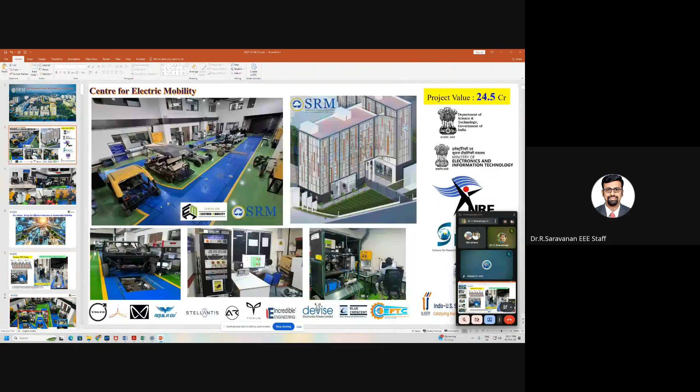Bharatiraja sir, welcome sir. Hello sir. Is my screen visible? Yes sir, visible sir. So first of all, I would say a small apology since I had not noticed this. No problem sir. So till what time do we have? Till 6:30 to 8, sir.

Okay, fine. So let me start from my first slide, about where I belong and about our Center for Electric Mobility, followed by today's topic, recent trends in electric vehicles. So basically I am in Kattankulathur campus, this is one view of our campus, and our center's name is Center for Electric Mobility.

Sir, can you switch on the video? I will take a screenshot. Definitely, you're able to see me, right? So yeah, this is basically our lab facility. We have a full-fledged building for this center. We are almost equipped now with many instruments which are mainly for development as well as testing.

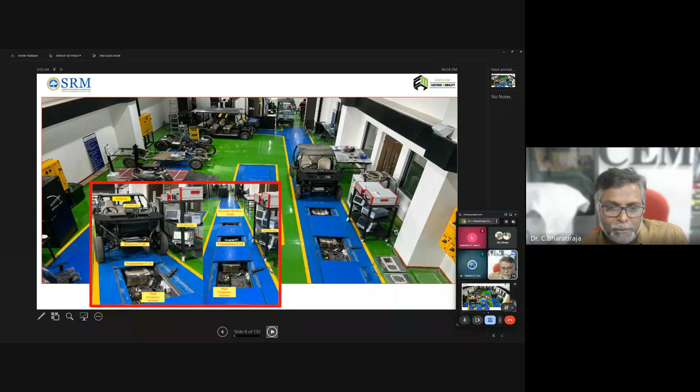So such kind of capacity we have. Currently we are working with dynamic wireless charging with a capacity of 11 kilowatts, but this setup is capable of going up to 50 kilowatt capacity. This is one of the best features we have in our center. There are some ongoing projects with the wireless charger, such as charging for scooters and some battery related fuel cell work.

Of course, this is an EVSE charger. Any charger to be validated with the dynamic value of the grid, this instrument will help mimic the actual grid. Sometimes we can force sag, swell, and other power quality issues. This could help validate vehicle-to-grid and grid-to-vehicle aspects.

And this is our HIL facility. Hardware-in-loop is very important, either to develop a motor controller or for microgrid or any hydrogen study. So we have a dedicated HIL for motor controller, and we also have a dedicated HIL with a dyno setup for testing the motors as well.

So you can see these are the major portfolios we are working on. Of course, we are covering all areas of EV, starting with motor development, controller development, charging development especially wireless charger. We are doing a lot of tier level products, energy storage meaning battery as well as fuel cell, and we are also working with charging infrastructure in a consecutive manner of microgrid and nanogrid structure.

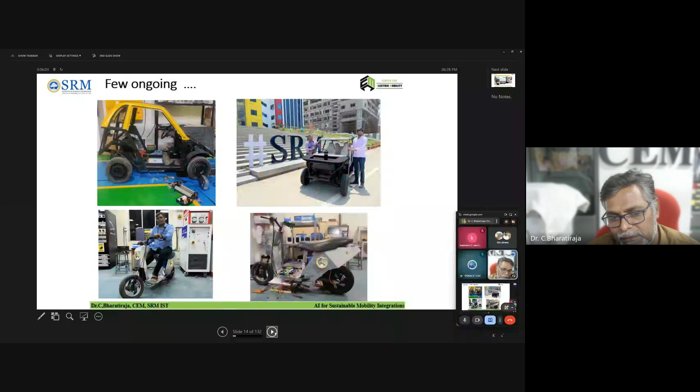Apart from that, currently we are working on benchmarking some EVs at full vehicle level, including wireless charger and scooter level. So these are some of the pictures. We donated this exclusive autonomous vehicle to DST, as you can see this was given in 2023, and now it is in operation at DST.

And there are many companies we have collaborated with. I just added one picture with Stellantis. Stellantis has donated 2 vehicles for research purposes, one for validating with the wireless charger, another for polyphase motor. Currently this work we are doing with Stellantis.

So today's outline is that I wanted to give some overview about EV. You might have had a lot of information from social media, and I believe majority of students and faculty here could have collected so much information from different forums about EV within India and outside India. Definitely you could have collected some metrics also. So probably I am recapping, or telling some new information, about different architectures of EV, which is very, very important.

Then individual system level, how it is structured and what performance is expected. And end of the day, whatever we are developing in the laboratory has to go to the market, so some compliances we have to follow, and what is the current market access in this portfolio, we will see. With respect to the world, the order is something like by 2030, majority of the automobile segment will be converted into EV. The reason is very simple: people want to migrate because of fossil fuel dynamic pricing and renewable energy penetration. But very importantly, we want to make green energy so that this carbon footprint will be reduced.

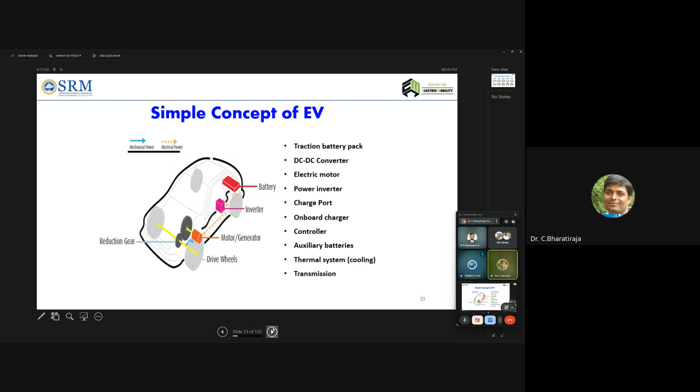This is probably a light vehicle chassis unit, so these things are additionally added. So different architecture will be there in the EV. In an IC vehicle, everybody knows we have a diesel or petrol tank passed through the engine for operation. Beyond that, we have a different category that uses EV with IC engine.

So probably we can say hybrid electrical vehicle. Many companies are actually developing hybrid electrical vehicles. Even Maruti, which has very high market capital in India for selling cars, is not producing or selling a single pure EV, but they're developing a hybrid EV with Toyota. You all know the hybrid Maruti Hyryder and all, it's a very good vehicle. So basically in a hybrid vehicle, we have a battery inside and of course a motor inside.

Whereas in a plugged-in hybrid vehicle, the battery is a little higher. So what is the difference between hybrid and plugged-in hybrid vehicle? In a plugged-in hybrid vehicle, you can connect the battery to charge from an external electrical supply, so the battery size also will be higher. Automatically the plugged-in electric vehicle gives better range than the hybrid electric vehicle. It's all about the cost factor.

So BEV is nothing but battery electric vehicle. It's a pure EV which has only a battery pack, it does not have any kind of petrol or diesel engine inside. So this is what everybody is looking for.

So the hurdle with us here is that this battery pack is not sufficient enough to serve like an IC engine. Petrol or diesel you can easily refill, but the battery cannot be charged very quickly. Provided you want to extend your range, you want to increase your battery rating as well as sizing, if you increase the sizing, the vehicle cost will go high. So this is a win-win situation problem: neither can we increase the size, or the fast charging of your battery has to be supported. So either way, only through this can the pure electrical vehicle succeed.

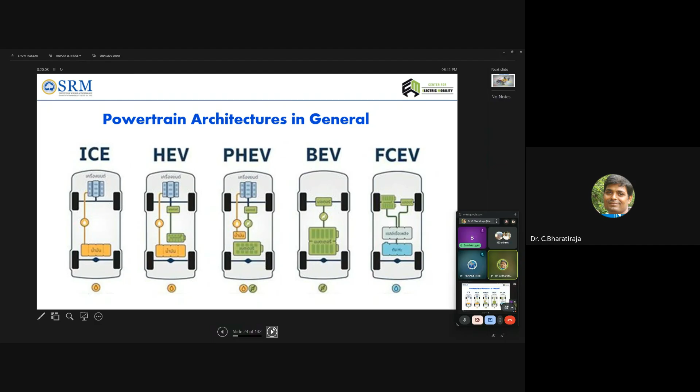As I already mentioned, this will give a clear picture of how the car segment EV architecture looks. Basically, you have a traction motor, which is used to drive the vehicle.

For that traction motor, you want to control it - that is nothing but your motor driver, which will be very close to your motor. And you have a battery. In any segment - car, bus, any vehicle - the battery will be associated or allocated on the floor of the vehicle body. So it is a floor mounted battery.

Then of course you have a charger to charge this battery, and to connect the charger you have an onboard charger, because you always have an AC supply or DC supply. Suppose it's AC supply, you have to use the onboard charger to convert AC into DC.

And then you may have an auxiliary battery. It's a small battery used for the electronic system, as well as door opening, closing, wiper motors and all that. So the traction battery is only to support the motor to drive. This is the general architecture of an EV.

If you see other aspects, how the plug-in EV will be - again, as I already mentioned, there will be an engine and petrol or diesel tank, provided you have a charging point to connect the battery.

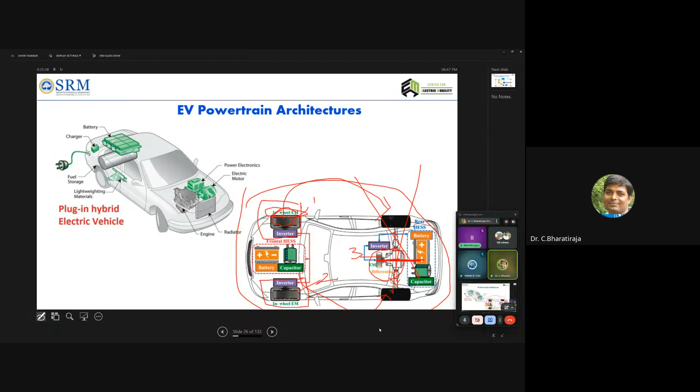Suppose this whole portion I am removing, again this wheel is also connected with another motor. When all wheels have a motor connected, it is a four-wheel drive. So basically this is the equation.

So the electrical architecture, if you take any EV, it is something like: any wheel you have a differential. Why do you need a differential? Different speed allocations and all will be there. And next, you have a transmission. This transmission captures whatever force is coming from the motor.

Then this is the motor. Here I mentioned BLDC motor, but you can assume it is any motor. The motor controller will operate the motor, and the motor controller needs a DC supply, which comes from the battery. The battery needs to charge, so you should have a charger, which comes from a DC-DC converter. And sometimes a super capacitor is also there in the vehicle.

Whenever you give a brake to your vehicle, the existing back EMF or available magnetic field will go to charge the super capacitor, because the battery cannot capture that amount of quick charging. So it goes back to the super capacitor, and the super capacitor then discharges into the battery. So the battery only, end of the day, drives the motor. All together it has to be operated - this is called energy management. This is all there basically in any EV.

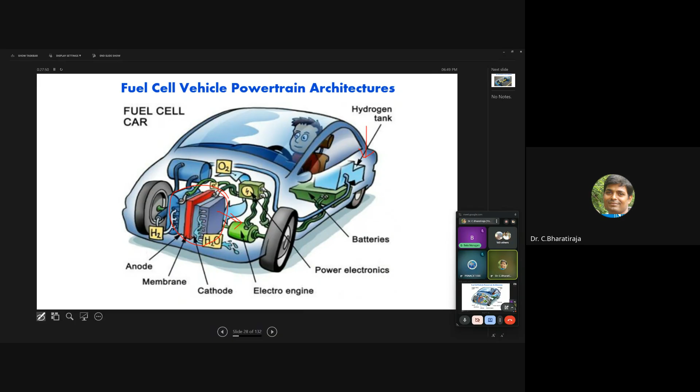So this is a picture of a fuel cell. This shows how they attach the fuel cell - you can see this cylinder is quite dangerous. Fuel cell systems normally involve three parts that an academician has to consider: first, hydrogen generation, hydrogen storage, and hydrogen usage. As electrical engineers, we can use the hydrogen usage part, but very importantly, hydrogen storage and hydrogen generation are also important. Hydrogen generation within the vehicle is not possible as of now.

There is no technology yet, but the entire world is working on it. Hydrogen storage, however, is possible - we are all using cylinders for storage. You cannot imagine, this is 100 bar pressure, 200 bar pressure. At that pressure it gets explosive, affecting nearly half a kilometer. So this cylinder holds a huge amount of hydrogen.

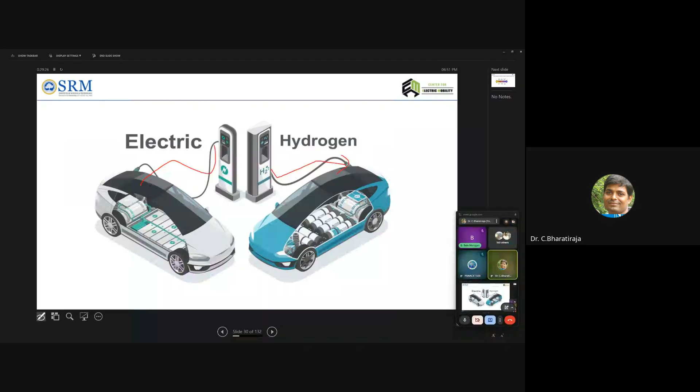Roughly about 20,000 liters of hydrogen in gas or liquid form. The type of cylinder, and how you manage the thermal aspects and all, is very important. Wherever the car body has space, you can attach your cylinder - there is some procedure for this. So the point is, neither electric nor hydrogen vehicles avoid refilling. Hydrogen is filled as gas or fuel, while electric means you have to fill, what do you call it, your battery.

So we'll just skip some slides. This is what the real powertrain will be - you can see whatever these small components are. This is the battery module, and the whole system is called the battery pack. On top of it, there is a unit called BTU, battery terminal unit, which gives DC supply to the motor control. This cable, whatever I am marking now, represents the cable for the entire vehicle.

At present, the entire industry is working at, in the past, 400 volts. Now from October 2025 onwards, all EV companies have decided to go for an 800 volt system. Why 800 volt system? With that, you can have a huge amount of energy density in the battery and a lighter amount of cells, so that your car body portion will be reduced to half of it.

The question is about energy density batteries, which were previously not available but now are. That's the reason the industry moved on to 800 volts. When you go to 800 volts, your cables are not highly intensive with respect to current, so your wire harnessing, as well as interoperability, EMI, EMC, all go down. That's why the industry moved to this higher voltage, called the 800 volt system.

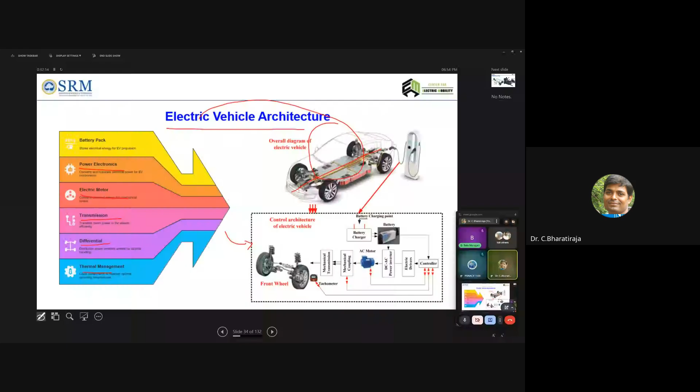So generally, nobody goes straight away to manufacturing the vehicle. First they go for a model; each and every component they design, they build the model controller, they validate it in HIL and SIL. HIL means hardware in loop environment, and simulation environment as well. Then component by component they interface in the vehicle body, and then the whole vehicle is manufactured. Then they test it multiple times. Only then does it come to the market.

Now I am going to tell you what future powertrains will look like in the market. This has already started. A company called ZF is doing this. As of now, this mid-drive motor will look something like this. You see there is a wheel, a shaft, and the mid-drive motor will be here. So for this whole portion, 3 to 4 OEMs will be there. OEM means original equipment manufacturers, working together to develop a system.

So assume that this is a system. There are multiple OEMs working together. For example, if they start today, they would end up finishing this project by 2030. But that's not how it can be done hereafter. It has to go very fast. For that, the powertrain itself is being developed segment by segment.

So there's a mechanical powertrain model and an electrical powertrain model. The electrical powertrain model is what I'm showing here. The mechanical powertrain model is probably about the spring and braking system. As you can see, one motor will be here, another motor will be there. These systems are connected to the vehicle body. You can straight away connect this item into your vehicle and make your powertrain in a shorter time.

You can see motors engaged here. This is the current system, what we have available, but the market is moving towards this kind of system. This is how the mid-drive is connected in the truck. The mid-drive is in the middle portion, and on both sides you can connect your wheel and operate it individually. You have a brake drum and other mechanical connectors.

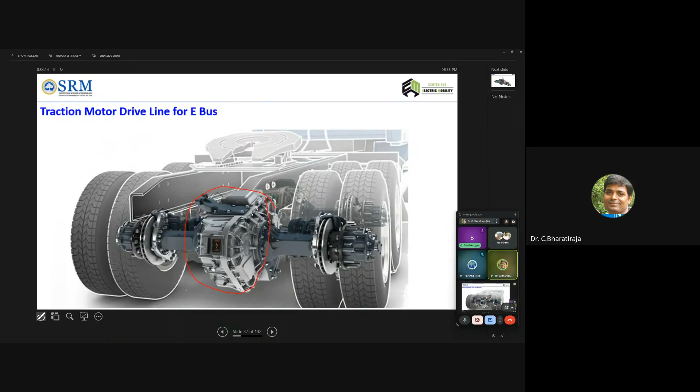This is the same system I explained earlier; I'm just focusing on the blender drawing for your further understanding. There is typically weight balancing as well, but don't assume this is weight balancing — actually it's a hydraulic system for suspension. It uses a special suspension that includes a double layer: one is hydraulic, the other is an electrical linear actuator. With that, it operates in a millimeter range of suspension. So all of this is available.

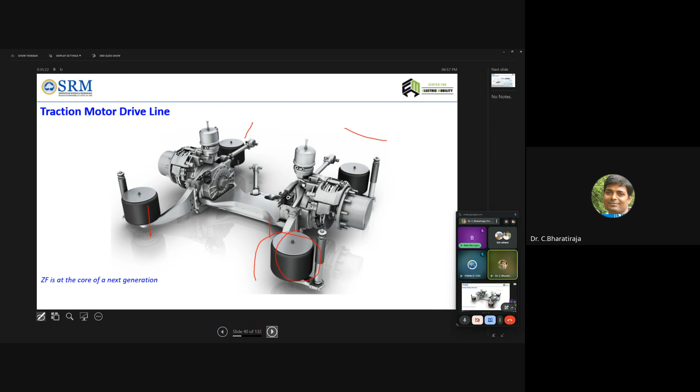So then, how does this fit into the bus? You see, it's a very huge bus, but the portion where the wheel and motor are connected is very, very, very small.

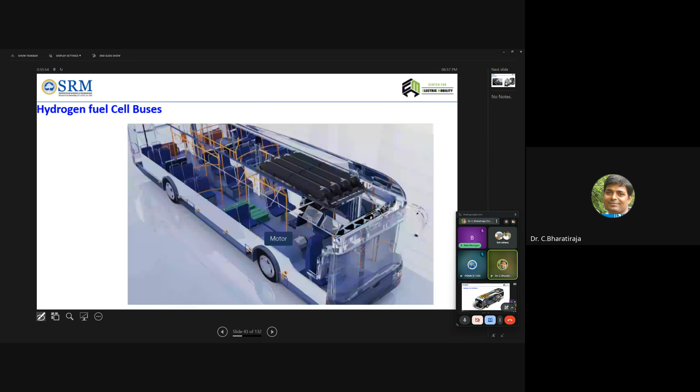So yeah, first for understanding, I'm just having some figures to know about how the motors are connected.

So coming to battery, as I already told, the battery is connected in the platform. So battery means battery cell, then battery module, then battery pack. Number of cells is module, number of module is actually pack. You can see this is module.

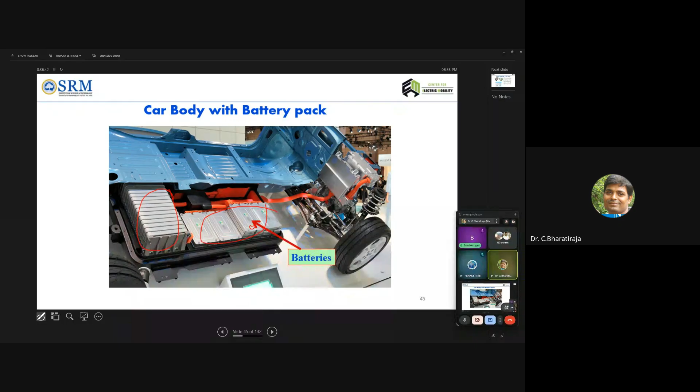Number of module and number of module combinedly it's called number of pack. So basically this is one module, this is another module within that pack. You open the module, furtherly what is there, it is cell. I will show you later, okay? Probably I can show you later.

The question always there, what is peak power and what is rated power? Assume my car is moving in this road. So my cursor is a car moving in this road. Here there is a portion speed breaker. Here there is a portion is a hill. So now my car is moving. So this is a flat road.

I could derive the power from the motor is the same. It's a rated power. Suddenly I am going a speed breaker. I need extra power, correct. From what? From motor. What is the formula? Basic formula for motor, P is equal to 2 pi nt divided by 60.

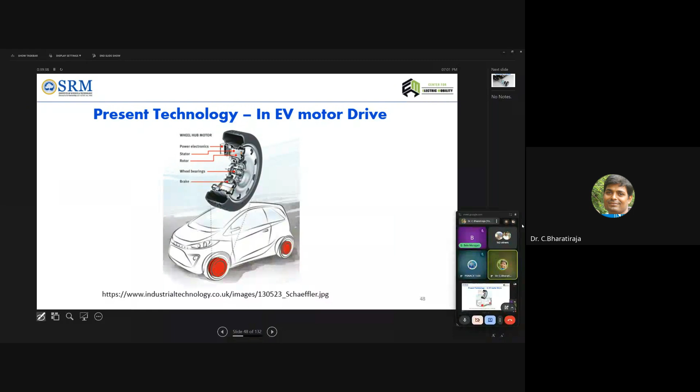So what is in-wheel motor? In-wheel motor means your motor, power electronics converter, controller, brake, what else? Everything is there within the motor itself. So that is called in-wheel motor. As you can see in this picture, all are there in the wheel itself, wheel drum itself.

This picture gives even more information. You see, this is wheel, this is your casing. I just connect the motor here and attach my brake shoes and disc brakes. So in such a way, you can build your motor within the vehicle wheel itself. Now you see the powertrain, how very simple way.

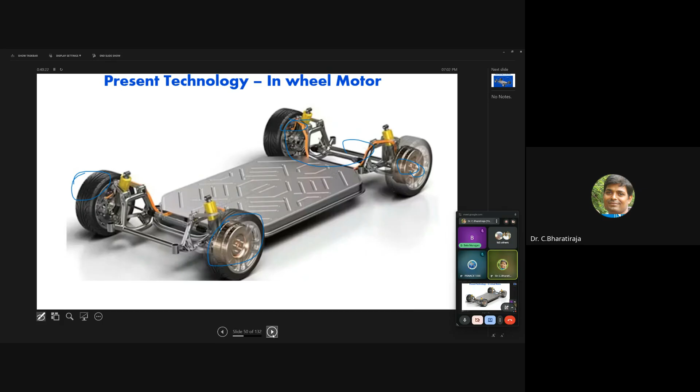So this is what the present technology on the what do you call a powertrain, it's called in-wheel drive. So basically, car body will be so simple then. So you develop your powertrain and superstructure and other aspects. These are already available in the market, right? The very clear picture is also available.

Okay, so basically this is in-wheel motor. You can see within the wheel itself, power electronics, stator, rotor, bearing, everything will be there.

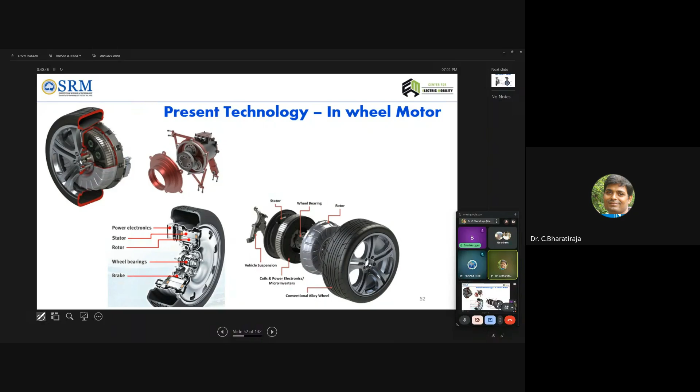So see the suspension for the in-wheel motor. So basically, now the market is moving on this kind of suspensions. So initial suspension means normally we have suspension straight away to connect to the car body. Now this kind of suspension are recommended.

It is there in aeroplane basically. So what will this help now? You see the wheel of the vehicle always operating at about 70 to 80 degrees, even lesser, never 180 degrees. But this wheel is capable of going to 180 degrees. If it goes 180 degrees, then the vehicle can park in the vertical position. So this is a parking area. Normally the vehicle has to go here, go here, go here, and then go back. But in this case, the vehicle can come here and go straight inside.

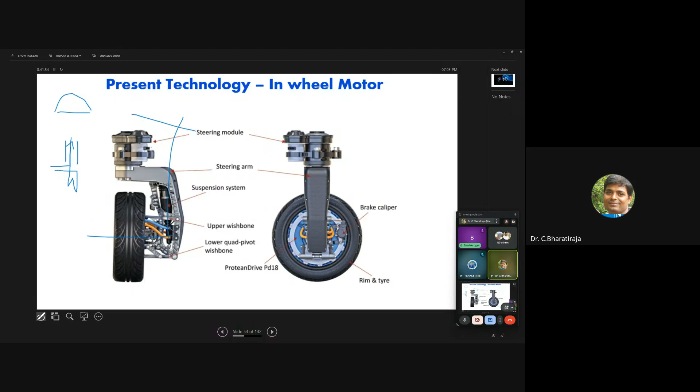Okay, so about the in-wheel motor. The permanent magnet synchronous motor, PMSM motor, will be classified into two types. One is radial flux motor, I can call it radial motor. Another one is axial flux motor, I can call it axial. This axial motor is what is called the in-wheel motor. The size is very, very small, so you can connect it in the wheel itself.

So this is the difference between radial and axial, how it is working. In a radial machine, basically you have a stator with pole pitch throughout, and the winding is also totally continuous, distributed winding. Whereas axial flux is a concentrated winding, scattered like within the pole itself. That's the reason axial flux motors are small in size. But there are a lot of challenges for axial flux, particularly thermal handling and other kinds of issues.

I'm talking about many things about the motor, right? So currently we are developing, through one project, a 40 kilowatt motor. What we have to do is reduce the magnet. Magnet is very, very important in the motor, but with respect to cost, the magnet is the biggest culprit. Why culprit? Because the cost of the magnets is very high, and the magnets are also not locally available. If you take India, we are not manufacturing any magnets, it's all coming from China. China is so good at manufacturing magnets.

China doesn't have much mining actually, mining is there in some other countries, but China imports minerals and creates manufacturing facilities to manufacture the magnets. Neodymium magnets are used basically for the permanent magnet synchronous motor, especially for EVs, neodymium 45, which is a high-end grade. So we took an opportunity to design a motor such that we could reduce the rotor magnets, meaning only the rotor has magnets. We fixed a 23% reduction target and we achieved it. And stator copper loss we also wanted to reduce, so we designed it such that we are reducing 10% of the copper winding itself.

Then we developed a 400 to 600 volt traction inverter, with which we are driving this motor. Finally we have to bring a system like this, inclusive of controller, motor, and as well as gearbox. So now we are working on it with this system.

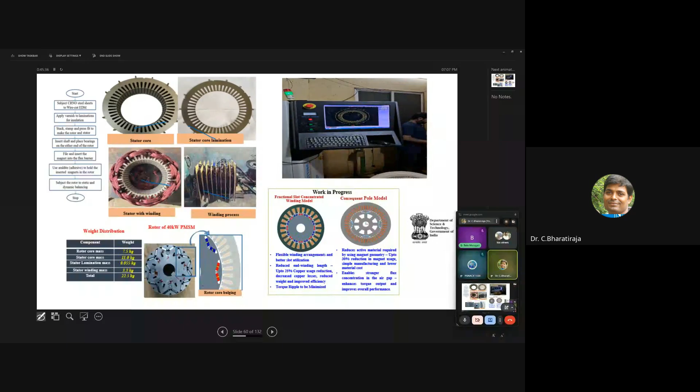How do you do that? It's all real value, what we are developing, and we are also comparing with that. Some of the results I have mentioned here, how transient performance and steady state performance of these motors are validated. This has been tested in the system, these motors are tested in our lab actually. So you can see the student testing continuous performance as well as discrete performance. We are continuously validating with a different range, operated through the power supply, which of course mimics your battery.

Okay, then coming to battery, as I already promised I am going to showcase the battery pack and module and all. You can see this is the battery pack. Once you remove the battery pack, inside you have a battery module as well as cell, and the BMS also there. Now look at that, the cell will have 3 or 4 types, I can say. One is cylindrical cell, another one is prismatic cell, another one is pouch cell. So the cylindrical cell is this one, prismatic is this one, and pouch cell is this one. Pouch cell is what you have in mobile phones. Now the entire market is focusing on pouch cells. There is one reason for that, does anybody know the reason?

Those attending here, anybody know the reason? Even one student sitting with me, listening to all this. You know the reason? No reason. I will tell you the reason.

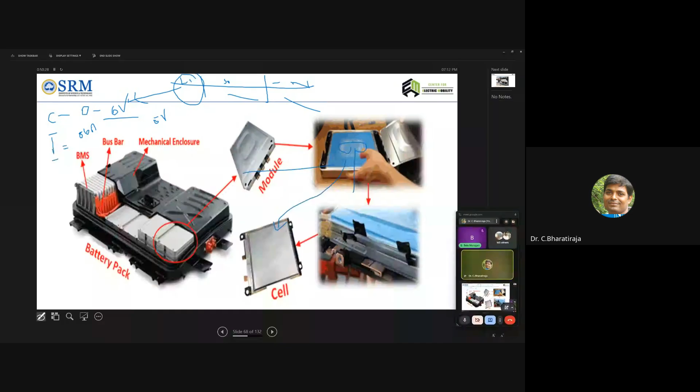So as I already told you, 0 to 6 volts. So current rating, AH I may say - recently we are testing one company, so I will take that value. It is 86 amps pouch. So one pouch, 5 volts - let's say take 5 volts, not exactly 5 volts, like 4.6, something like that. But I will take 5 volts, 86 amps. Then it is an 800 volt system.

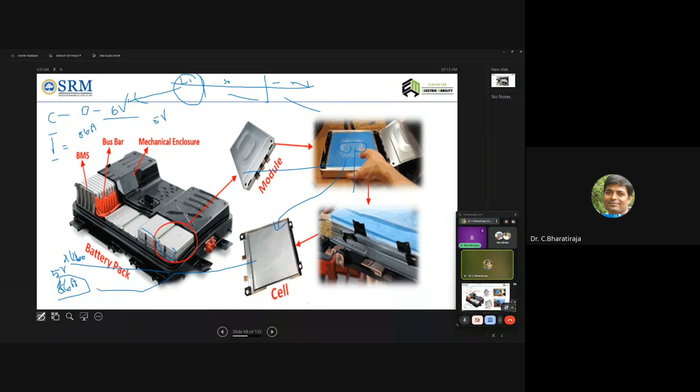Of course you will have 40... 160 series you want, nearly 800 volt system. Then 86 amps current. So likewise, you can create a module. Then all together, electrically you can connect. You will make a pack. So end of the day, the pack will be like this.

So this is for a bus. For understanding, I am showcasing. For a bus, normally pouch cells they will not go because pouch cell is so costly. It may be prismatic. So this will be one pack. This will be another pack. This will be another pack. This will be another pack.

When you put the electric gun to charge, all will charge simultaneously from the EV power. But it all has separate connectivity while charging, individually discharging. We are thinking that all are charging combined - it's not like that, it will all charge separately.

So if you open the bus backside, you can see the battery on the other side. Mechanically, you can remove this side, but electrically, you can charge this side. So you can even keep a battery on the top also if you want to provide extra range.

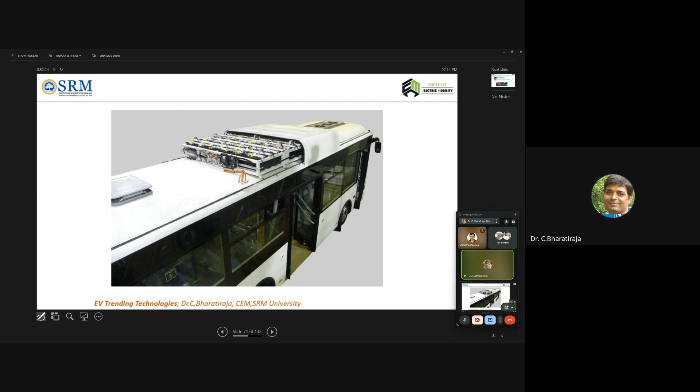So I'll skip something and go to the battery management system. Take any battery management system, its duty is to manage the cells, battery pack and module, provide thermal and other reliability, and measurement of the SOC, SOH and all that.

Now in recent days, almost one month, people are talking about battery Aadhaar. Anybody knows about it? Participants, anybody knows what is battery Aadhaar? I don't think anybody has an idea. So globally, there is a term called battery passport. So battery Aadhaar within India, battery passport in the entire world. It's very simple, like a passport - it is easy to understand where you went, when you entered a particular place, when you came back to the country. Am I right or not?

So likewise, with an Aadhaar number itself, they will understand everything about you because KYC will be there. So when the customer is buying the battery and goes for a service, he is sometimes fighting with Ola - why did the charging happen, why did all this happen? Because there is no proper data within that.

So India recently announced there is a battery Aadhaar - who is the seller, no matter which car company it is, the seller, manufacturing date, packing date, selling date, vehicle first time charge, second time charge data - likewise how many times you are charging, where you are charging, what service you have done, what components you have taken. Five years later, you are selling your car to somebody, or selling the battery alone to somebody.

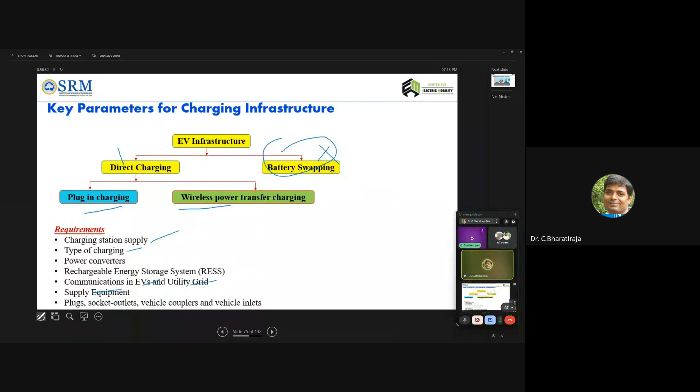But for direct charging, there will be plug-in charging and wireless charging. If you take wireless charging or plug-in charging, there are some requirements you need for developing a charging infrastructure - one is the charging infrastructure, type of charging, communication with respect to EV and grid, sockets and vehicle coupler, inlets - everything is needed, so all together it may be designed.

So, onboard charger, in the sense that you are available with the AC supply, you have some battery BMS inside the vehicle. So you have a power electronics converter where PFC, rectifier, and some charging unit charge your vehicle. So at present in the market, chargers will be available in AC as well as DC.

So if you have AC single phase, yes you can charge. If you have AC 3-phase, you can charge. It's very simple - assume there are 6 pins. Plus and minus, these are engaged for DC charging. So this is neutral, R-Y-B. Suppose it's a single phase charger, these two will be engaged, or if it's 3-phase, R-Y-B will be engaged. So whatever AC is available, then onboard charger - DC will be available, this is the off-board charger.

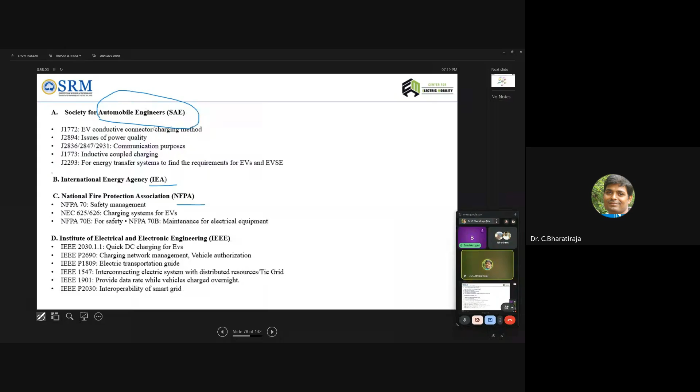There are some standards for charging. There are also standards for motor, but not as many. For charger, there are a lot of standards. SAE, Society for Automobile Engineers, has a standard for charger, communication, coupling, and all about. Internationally we have standards called IEC and IEA, and some fire protection standards. That is NFPA, and IEEE also have some standards.

So the key strategy for any charger is the mechanical design. That's very, very important. Then EMI, EMC is also to be addressed. Then performance, which means voltage, current regulation, efficiency, and fault recovery. And environment also, the IP protection.

IP protection means, for example, if you take a wireless charger, water, ice, all will appear on the road since the charger will be on the road. So you have to protect properly with shielding. IP65 is a standard for testing with the rain scenario.

IP67 and 68 is for flooding scenarios. So all these need to be tested: humidity testing, cycling testing, thermal level and salt testing, even needle testing, pressure testing. There are so many tests that need to be done. Then electrical safety, installation testing, ground testing, and overground protection testing.

Nowadays people are very concerned about cyber security testing as well. Why? Because, as I already told you, KYC of battery and all. Anybody can easily enter into the BMS. They can give malfunction data to the BMS to operate the vehicle battery through BMS. So the whole company can collapse.

It's very simple, even I can do it. Why can cyber security crime people do this? Simply you can enter into the BMS, go to the threshold value, change the threshold value, that's enough - automatically everything will be gone. Am I right or not? So the battery life goes down, or even sometimes you can blast the vehicle if it is a wireless charger.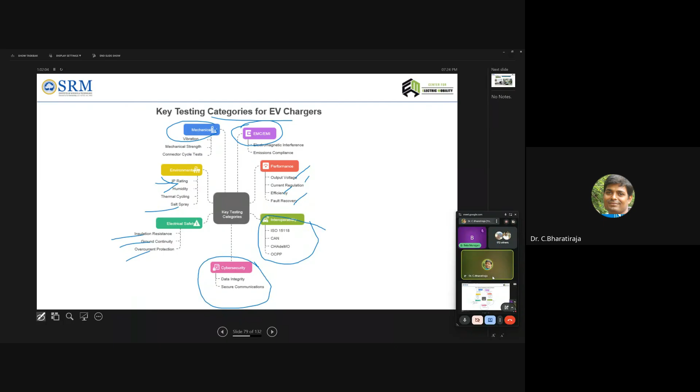So this interoperability needs to be addressed. Now another charger I want to explore - it is called pantographic charger.

I am 100% sure this will be a solution for India's local bus service segment. Why am I telling you this? Because this is already experienced in Japan. For this pantographic charging, you don't need the highest level of infrastructure - you just have a pole on the road.

I assume you've seen this green bus parked on a Japan road. There is a lane where the bus stops, then a pantographic lift comes and attaches to the bus. During the time passengers get in and out of the bus, a high amount of voltage, 11 kilovolts of system, is supplied. After that, the bus has a transformer on top that steps it down and goes to the battery to charge. So in 1 to 2 minutes the battery gets charged.

But likewise, the bus stops at so many places, so throughout the day the bus can operate - shorter distance, shorter charging time. It is called pantographic charging. This is basically the architecture. I don't have much time to explore this, but I will show you some pictures of how it is supposed to be.

So this is the way to operate. The bus driver will give some signal, and automatically the pantographic motor will come and attach. This is highly possible. At the bus stand, nothing to do - you just park your bus, create some pole over there. During the time of bus parking, it will get charged. Look at the cost - nothing. There will be a big transformer already available, just giving the wiring is enough. Some infrastructure needs to be addressed.

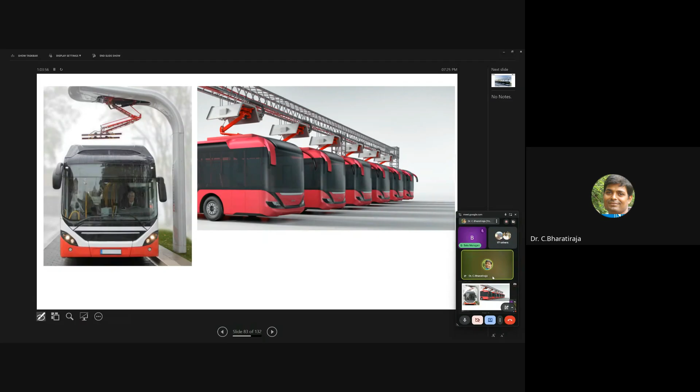It's already there in Japan. This is called pantographic charging. Okay, so this is wireless charger - even better than pantographic, I may say, but cost-wise and some kind of handling issue will be there. It's nothing bad - when you charge your vehicle, it gets charged. That's the concept actually.

So for wireless charging, according to my perception, South Korea is better than any country. They developed open lane EV bus wireless charging. It is available anywhere in South Korea. The bus will go and park on the blue color line, and it gets charged automatically. So this is the structure of what they have actually.

There is an orange color and a red color pad. The red color pad is a receiver pad connected to the bus. The orange color pad is put on the road. Likewise, so many pads also can be attached - since the bus body is bigger, you can attach many things. The road is also already there.

They are already built in the UK. Renault has tested this. But in the future, not all roads will be connected with wireless chargers - only a certain portion will have the charger. So as you can see, there is a car here about to cross a certain portion. Here, a huge amount of current will be passed through the car - this is the flash charging concept. Then later the car will go a certain 5 km free, then again get charged. So during motion itself, you can charge, but a lot of research is happening in this area. Let's see how it goes.

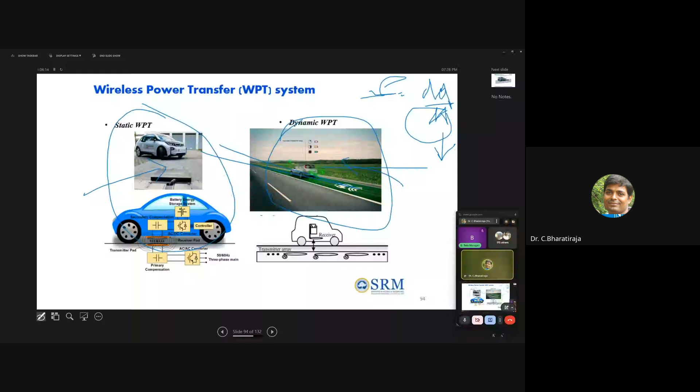So with wireless charger, again, static when the vehicle is parking and while vehicle moving, you can charge. But this is not highly proven because the formula is E equals dφ by dt, the rate of change with respect to time. Time here is vehicle speed - as vehicle speed increases automatically, the denominator increases, so the numerator, the net value, will go down. So as vehicle speed increases on the road, the charging will get reduced. So you have to go slowly - that is the only hurdle in front of us.

But now people are talking about - it's very funny - while one vehicle is going, another vehicle behind it gets charged. That's called vehicle to vehicle. At present, vehicle to vehicle charging happens in a wired way, but people are talking about one vehicle going behind following another vehicle to get charged. But who knows, this is also possible very soon, practically.

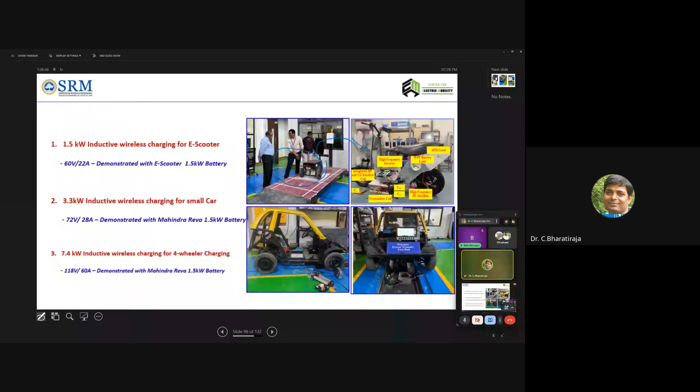So we developed so many things in wireless charger. As you can see, for the scooter we have done a demonstration - this we have migrated to a real scooter. For the car, initially we did a demonstration, and now we have built the whole system in the car, and some pictures for your information.

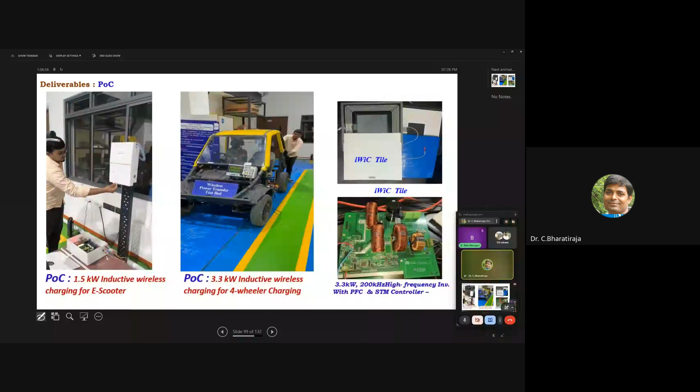What my student is doing - we developed a POC where the scooter just parks, he has a card, you swipe the card, and automatically the vehicle gets charged. So these are the tiles we developed for that - it's a wireless charging tile. In your home, you can replace your tile with this to charge your vehicle. So what do you need? One tile, and also one power electronics converter you have to buy.

For a scooter, we are experimenting - this goes as a startup. We are experimenting for 25,000. Any scooter owner is supposed to spend this money, and they can convert their vehicle into a wireless charging vehicle. It is 1.5 kilowatt, so that vehicle will be charged in 5 hours time.

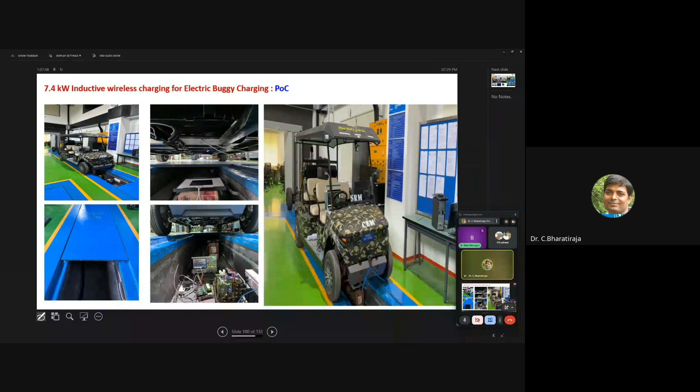So now presently we are working on this for a car also. Initially we are testing with the buggy because it's very comfortable to test. So now this testing is going on with the wireless charger, not only for static but we are working with the dynamic also. These are the experimental setups we have developed for that. We basically have extensive instruments to calibrate all the flux carrier paths and all about. So the first experimental setup has been done, and then we are moving into vehicle-level integration.

And we will go for the calibration of coil, foreign body, magnetic field, as well as the temperature and all about. So these are the final products what we have developed.

So this is under MeitY project. Wireless tile is ready. Grid connected inverter is ready. Power electronics converters for the input power factor correction is also ready. So this is a whole small circuit for the charger.

Presently we are working with 4 coils simultaneously like this, so that the scooter can charge with one coil, whereas the car, parking with the 4 coils, the car also can get charged. That kind of system we are building now.

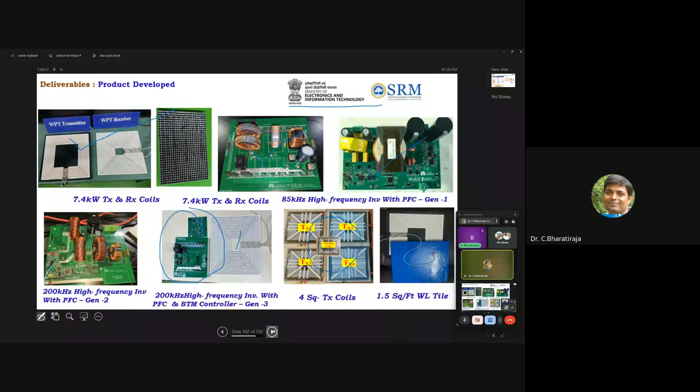We are also developing the application to take a pilot study in your SRM, attaching maybe 10 scooters for wireless charging. They can book a particular lot, and some EMS as well as a payment gateway we can produce. So this is what it is.

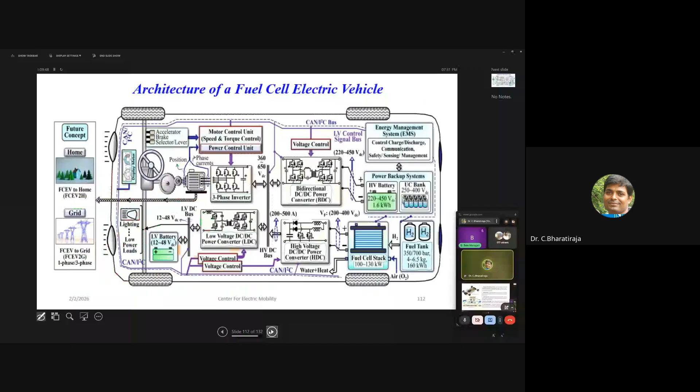So fuel cell, we are working on many things. Let me explain what we are doing. So this is our fuel cell. Basically, fuel cell means we have one PEM membrane. We have hydrogen, and the rest are all the portions what we wanted to put into the vehicle.

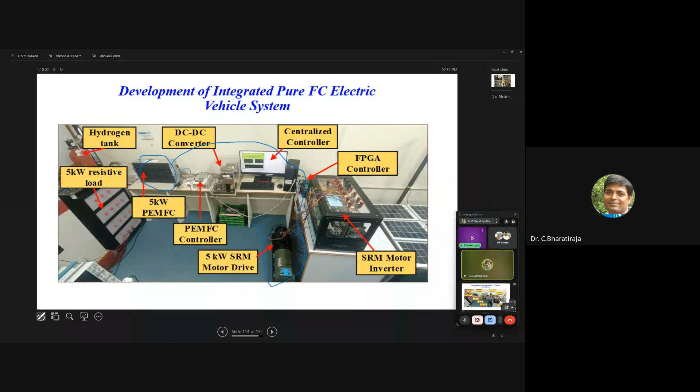So basically what we are planning: we want to develop one vehicle, a 30-seater vehicle, for 30 kilowatt fuel cell. So it is converting an IC vehicle into a fuel cell vehicle. We just wanted to demonstrate this, so for that we already developed one small

vehicle. Actually, it is called a lab experiment vehicle. Totally, we are engaging with fuel cell type, 2 cylinder, 5 kilowatt capacity. We are able to run this car actually.

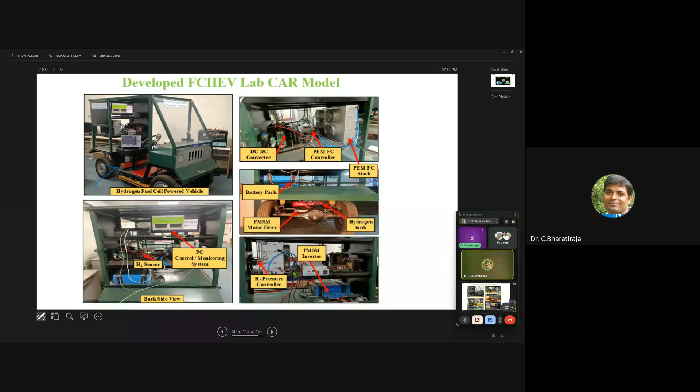Okay, so I think we are also working with autonomous vehicle. I'll give you a small introduction. So the autonomous vehicle, in the sense that there is no driver, of course. The point is, this is a big picture. So when you think about an autonomous vehicle, the rest of the things are all very conventional. Whatever you can, even you can park your Benz car near to this, a car coming to discuss with an autonomous vehicle is nothing.

Which one? This Benz car is nothing. They may have ADAS 4 also, no problem, it's nothing. Correct. So it is all an imaginary account because it's not being developed. People are talking about AI, many things, right? It's not being developed, but nobody can stop it. It will become very soon.

A vehicle without a driver in this huge Bangalore, Chennai, Delhi, Mumbai traffic, it will go. Uber as a company maybe can operate within India for the city. What do you call Uber's, what do you call cab service, nobody can stop this.

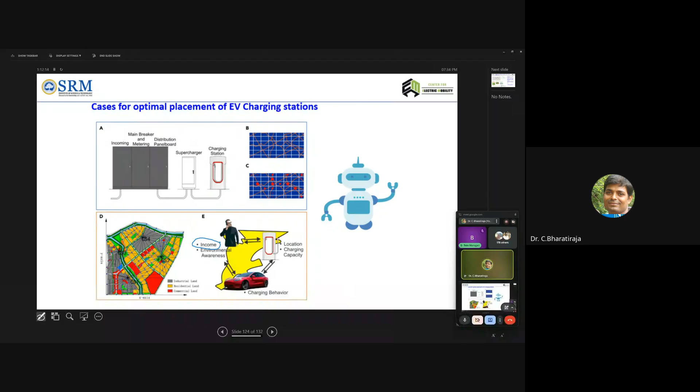Since autonomous is growing and AI also growing, correct? So what is needed? You have to include the AI, and this is very important because autonomous vehicle cost will be very high. Whether this vehicle makes income or not, that's the only thing we have to work out. But anyway, we are academic research, we don't want to bother about whether it makes money or not. Let us start to bring some technology. But for industry, of course, it has to be.

So yeah, there are multiple autonomous vehicles. We have to develop some digital twin to handle the battery operations of each and every component, because initially the driver gets an alert signal. Even if oil is less, we will get an alert, we will replace the oil at present. But once there is no driver, who will handle what's happening inside the car, car cleaning? Components will influence and all about. So there should be a digital twin.

So what is a digital twin? Anybody know what is digital twin? No idea? Okay, so digital twin is nothing but.

Today I am late 10 minutes, right, for this FDP program. This is my mistake that I didn't notice, I thought it's day after tomorrow, but anyway this is my mistake. Suppose if I have a digital twin, I dictate my digital twin to take this entire seminar like me.

You got it? I have a separate twin for me. The twin will do the respective operation. Let me do another operation. This is called digital twin. So a perfect model can be made. That model can mimic further.

So that's what digital twin is. Of course, the digital twin will be engaged with battery modeling and other aspects. Sensor is also getting a lot of role. Sensor and digital twin all together only make autonomous vehicle.

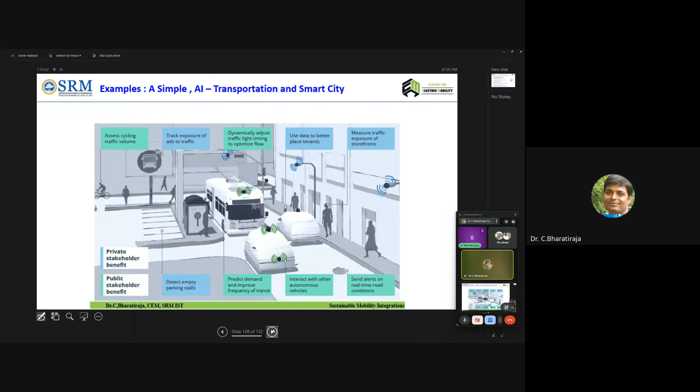So somebody wants to take a picture, those who are doing research in AI, in autonomous vehicle or electrical vehicle side with the inclusion of AI, I have prepared this slide. What are the AI tools you may use, what are the ways you can use AI.

You can take a screenshot if you want. You can plan for your research by using AI. So what we have done in our campus particular area, we have mapped it. Can you show one more time, sir? Previously. Yeah, you can take a screenshot.

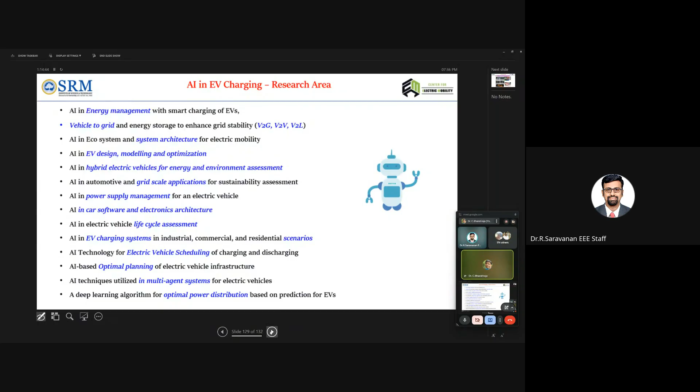Okay, so what we have done, we have developed an autonomous vehicle driving with minimum autonomy. Why minimum autonomy? Our campus has more than 1 lakh students. Of course I have intention to go further, but I don't get a proper trial track.

So we are getting a vector path, mapping everything. We developed an autonomous vehicle for campus commute. I will play it. I don't know why I'm not able to play it. Oh my god, so basically this is a video, I am not able to play.

So our students are testing at different levels. Since there are a lot of NDAs within this, I cannot show more than that. But of course, we are very good in autonomous, and we are developing something for defense purposes, so that's the reason we are not able to show.

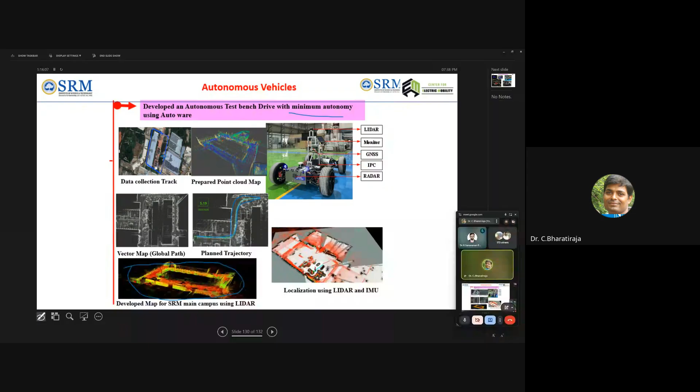So what we have done is create a 3D map, a vector map. Within the vector map, we set up the target area, as you can see here. Within the target area, the vehicle will go beyond. Within the map, whatever the floating value also, it will go and operate. That is the way it normally works.

We even tested it the other way also. Let me check whether that slide is available quickly. So these are the autonomous vehicles we have developed. You see, we are totally disengaged, removing steering and all. I think the system got hung. Yeah, so you can see this is the vector map.

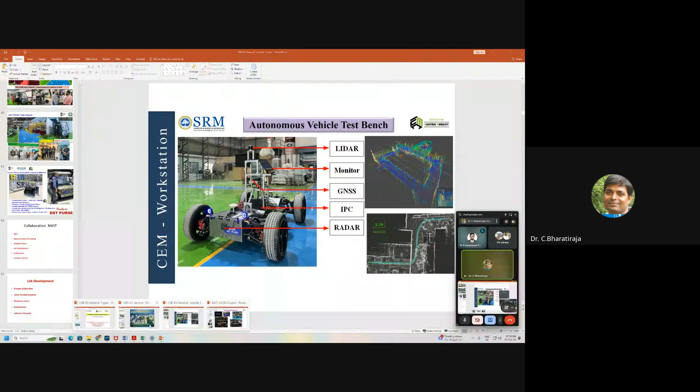Sorry, I don't have that video. Maybe you all know my LinkedIn? Bharatiraja Chokkalingam is my LinkedIn. On LinkedIn I have demonstrated all the videos, you can see. So my LinkedIn page is Bharatiraja Chokkalingam, so from that you can take it, you can see, probably you can understand.

Yeah, so with this I'm concluding. Our success story is very simple. We want to build our own vehicle, inclusive of our own systems. But of course, I don't have the capacity to build a battery pack right from the battery powder. But now we are working with one company for developing a battery module with their cell. So BMS and all, but not the battery cell. Leave the battery cell, rest everything we are inclusive, and we are now developing a vehicle which is capable of going fully autonomous.

And I'll proudly say this could be a benchmarking value, not just one, but a benchmarking value for autonomous vehicles for the country. So with this I thank my major financial contributor and supporting structure from DST, as well as my team. Because of their funding and my team, we have reached this level. I hope we will continue the same. So now I am open for the audience to discuss something.

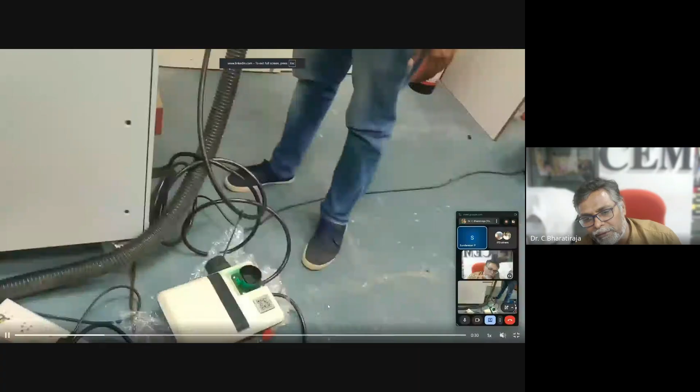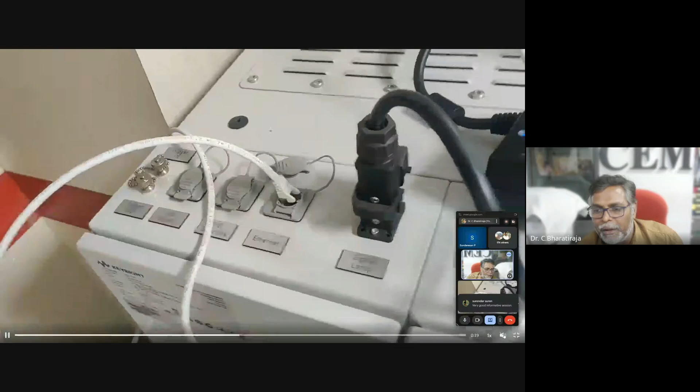Whenever any opportunity is available, it is posted on LinkedIn. Go to my LinkedIn, go to the post, go to the video, you can get it. Sure, sir. Nice presentation, sir. Thank you.

Any participants, ask questions, sir. Am I audible, sir? Good evening, yes I'm audible. Sir, is there any workshop available in this February month? Actually, I am also a research scholar doing research in Chennai only. So is there any plans?

February, I think I'm opening all the personal data here itself. Okay no problem, just a minute. My students are planned, just let me tell you. On seeing all your facilities, I'm really very excited. If it is possible, we can come and have a look and get some ideas. Sir, actually I'm just a fresher now, just 6 months are over, so I think a lot of new things are upcoming. Is it possible so that we can see?

So, you see, February 23rd you want to start? Fine, sir. Okay, 23rd, but it's not 6 days, I'm planning to wind it up in 2 days only. Fine, sir, in 2 days we will cover something reasonable. So we can apply through your LinkedIn itself, sir.

I will check it. What I told actually, you all are supposed to be on LinkedIn. So I will post on LinkedIn, so you can easily get a notification. Thank you so much, sir. Thank you. I will do it, thank you. Or else I will do one thing, I will connect and get all your mail IDs from Madam.

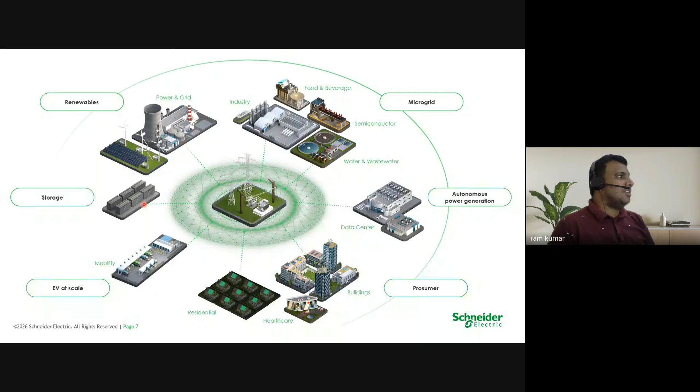The next thing is storage—battery energy storage. It has been an expensive topic in the past, but there are technologies and researchers coming up to maximize the utilization of battery at the scale of grid. Still we have a long way to go in research around battery energy storage, because the cost of ownership or maintaining the battery infrastructure is getting very expensive, so nobody is interested to invest.

But if we get some technology or research that comes up with a more efficient battery at grid scale, this is also going to scale up. Because without storage, renewables don't have inertia—it's a known thing. With the combination of efficient storage and renewable, we might be able to replace fossil-based power generation. So the opportunities are coming in this direction in the current market.

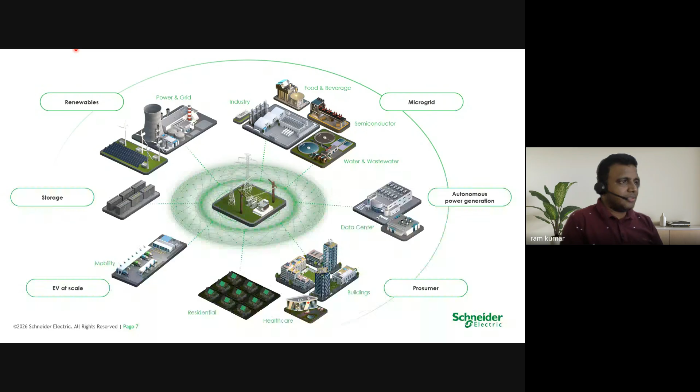Now, what is important? Energy and industrial intelligence. When I say this, I'm speaking about how to control them. Today we are speaking about an efficient world where we want to consume better energy, energy which can be more efficient—meaning the losses are minimum.

Most of you understand the power system as a whole. If you have proper planning—if you are able to plan what this residential human needs for the next 30 days—we can plan this infrastructure better. So this intelligence is going to rule the future.

You might even say, is everything connected today? Yes, slowly everything is getting connected. I'll show you in subsequent slides how everything is getting connected today. When everything is able to be connected with electricity, with the same electricity, we can also control them.

To control that, we need intelligence, and this intelligence is going to come in the form of data we collect from each and every character in this circle. This data is very crucial, and without it, it is impossible to control that big network. In the future, it is not going to be frequency or voltage which controls this—it is the data which is going to control the operation of the power system. This is going to be very important.

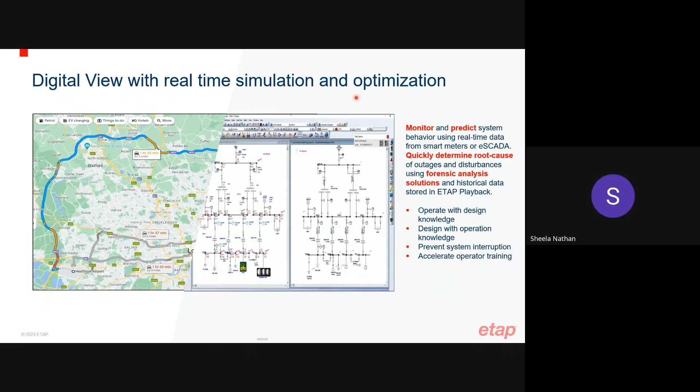So the practical application, what I could... we have seen this in the past. For example, we went to a facility in Sweden, where we saw a customer having a transformer of 50 years of age.

He had no money to invest, but he asked, "Am I nearing the end of life for my transformer?" This was the question he had. And he said, can you help me estimate the residual life of this transformer?

Okay, how do we estimate? Because our models just speak about current and voltage. They never include an aging factor, aging of insulation. It did not include what kind of climatic impact the particular transformer might face. We never considered that. Similarly, in Chennai, you install two transformers inside a building, well ventilated, and another transformer outside. You have the same mathematical model for both transformers.

A transformer within a well ventilated and well preserved environment may survive for 60 years, but the transformer which is outside might not survive 60 years. So we are missing a real world simulation. That is the biggest challenge for a digital twin.

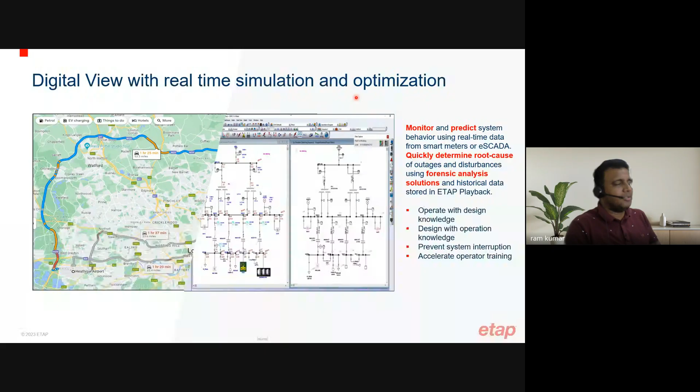We need to understand how the equipment is installed, how it's operating, what stress it's facing, what impact it's facing because of the environment, what impact because of loading, how many amperes it's being loaded with, and what chemical and property changes are happening within the equipment itself. That is the next wave that is going to come in. If we are able to get this into picture, then the digital twin is going to accelerate.

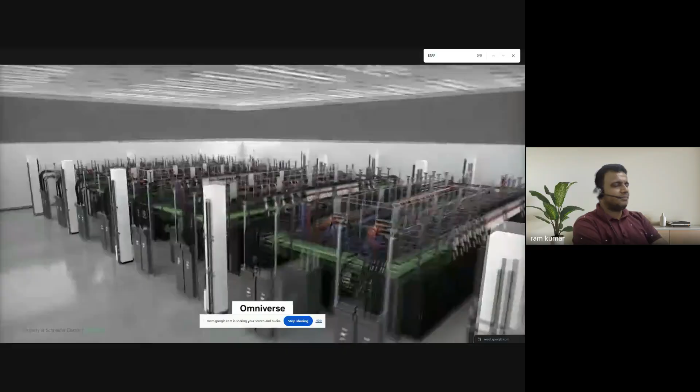The NVIDIA Omniverse blueprint for AI factory digital twins enables us to design and optimize these AI factories long before physical construction starts. Here, NVIDIA engineers use the blueprint to plan a 1 gigawatt AI factory, integrating 3D and layout data of the latest NVIDIA DGX SuperPods and advanced power and cooling systems from Vertiv and Schneider Electric, and optimized topology from NVIDIA Air, a framework for simulating network logic, layout, and protocols.

This work is traditionally done in silos. The Omniverse blueprint lets our engineering teams work in parallel and collaboratively, letting us explore various configurations to maximize TCO and power usage effectiveness. NVIDIA uses Cadence Reality Digital Twin, accelerated by CUDA and Omniverse libraries, to simulate air and liquid cooling systems, and Schneider Electric with ETAP, an application to simulate power block efficiency and reliability.

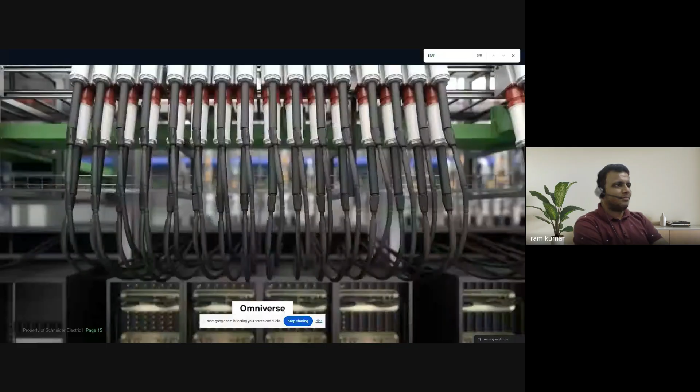Real-time simulation lets us iterate and run large-scale what-if scenarios in seconds versus hours. We use the digital twin to communicate instructions to the large body of teams and suppliers, reducing execution errors and accelerating time to bring up. And when planning for retrofits or upgrades, we can easily test and simulate cost and downtime, ensuring a future-proof AI factory.

So this is what the digital twin is. At Schneider Electric, we have been working on digital twin for the last 5 to 6 years on how to replicate the real world installations or real world products that we supply.

Even though we have a lot of improvements to make, the world is not going to wait for us. Improvements will come, but the adoption is going at a rapid scale.

Okay, so now let's see. This is a reference design released by NVIDIA. There was a mention about Schneider Electric that we have a digital twin that has been released. I will showcase you the digital twin we have created for NVIDIA. This digital twin is completely built with ETAP, Electrical Transient Analysis Program, which traditionally has been used for power system analysis. Today the power system analysis software is turning out to be a digital twin backbone of all power systems, and the basis of this is pure power system analysis, nothing more than that.

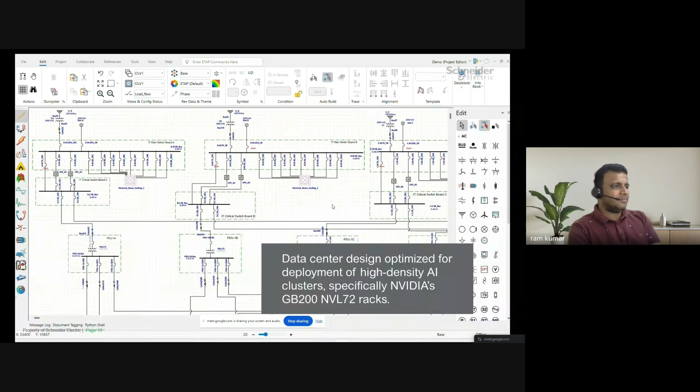Sorry, I just wanted to pass. I will stay like this.

So this is a showcase of how a data center with a traditional GPU can migrate to an NVIDIA AI GPU, and how an electrical digital twin can fast track the decisions and how we can design it fast. This was a reference design we released along with NVIDIA to build up their GPU in a customer facility.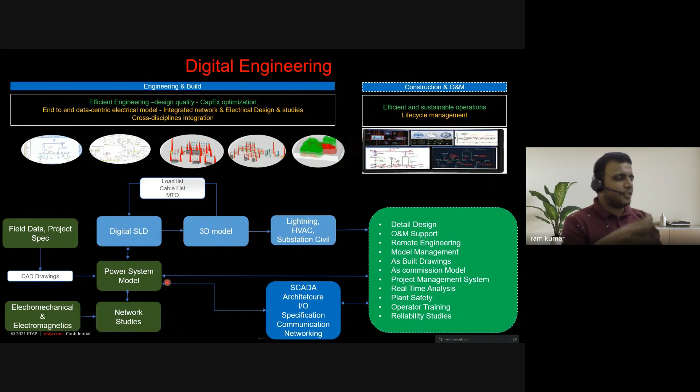And then your power system model, if you connect with SCADA architecture or IO, specifying the networking, you connect all your meters, the power system model will help you to make decisions. To be frank, the decisions made today are still manual. ETAP is just assisting you as an interface, but in the future, it is going to make decisions on its own with the help of the data cube or artificial intelligence. So whatever we are creating today, it is the base. Now we also have a use case for that.

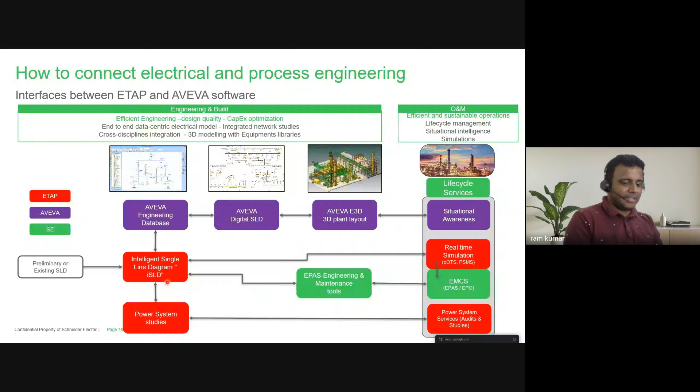I'll first showcase how 3D modeling and detail engineering happens between AVEVA and ETAP.

This video will explain the digital single line diagram concept. The electrical engineering is in progress, and a complete ETAP electrical digital twin is available. Power system engineering studies, like load flow, can be run to validate and commit changes to the design.

The ETAP model is automatically imported into AVEVA Engineering via a native import function. We are now in AVEVA Engineering. Once the import process is complete, a comparison table is available to improve efficiency and check data integrity before validating the AVEVA database update. The single line diagram is created in AVEVA Engineering utilizing the topology imported from ETAP. This is a key deliverable in the design lifecycle.

We extend the data consistency to the 3D engineering. The 3D plant model created in AVEVA E3D is interconnected with the AVEVA Engineering database. At this stage, we ensure data consistency between ETAP, AVEVA Engineering, and AVEVA E3D.

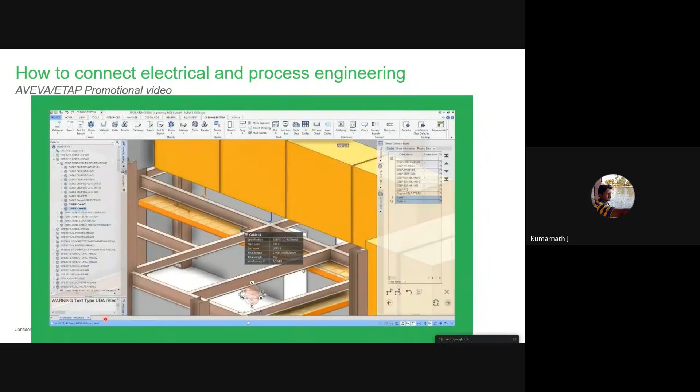Continue through the engineering process by proceeding to the cable routing in AVEVA E3D. Let's focus on two cables. First, AVEVA E3D and AVEVA Engineering global databases need to be synchronized, with all data sourced from ETAP as cross-sections are available. The exact length will be automatically computed with the auto-routing module available in AVEVA E3D. This module is based on embedded design rules, which select the best cable trays and arrangement. Now the two cables are routed within the layout, and their total lengths are available in AVEVA E3D.

Let's now update the AVEVA Engineering database with the new cable data and then export the database back into ETAP. Compare and update tables are available to easily perform the data synchronization. Cable length is now updated, and the 3D view is still available in AVEVA Engineering to check cable routing.

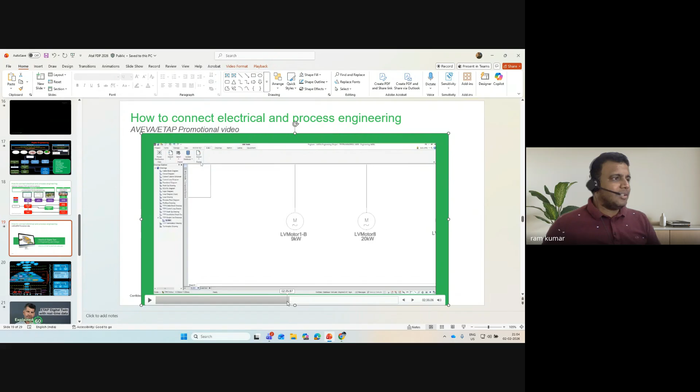So if you see here, as you updated the location in your 3D model, if you have just changed the location of your particular device in the 3D model, your cable length has automatically changed. And this cable length data is automatically backfed into ETAP.

So this real-time exchange of data is called a digital twin during design. Whenever there is a change happening in a 3D model, it will automatically get updated into ETAP, and ETAP will give its own results. This is what we do in the design stage.

So this is an example of how to do this integration between softwares, a mechanical software and electrical software. AVEVA is for process design and process layout. Similarly, ETAP is for electrical. This is in case of a process industry.

Now, what we saw in this case was an integration between ETAP as an electrical digital twin, and we also have something called a cooling digital twin. The cooling digital twin is nothing but a mechanical digital twin. Now these two digital twins are starting to communicate with each other, which helps us make decisions faster. This is completely during the design stage.

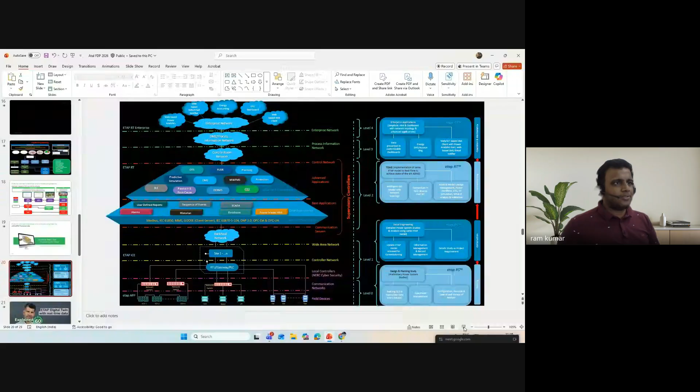Now, as per your question, I'm coming to the operational stage. This is what happens in an operation stage. A digital twin starts from the design. When you design a project, we start a digital twin.

We can also create a digital twin for an existing factory or existing manufacturing, which we are doing extensively today. A lot of customers who have big factories, big industries, they want to create a digital twin today. Even though their industry is 30 years old, they want to have a digital twin so that they can plan their decisions. This is how an integration of ETAP digital twin with each and every layer can help you make decisions.

Let me take my pointer out. So this is your base where you do your design and planning study. You build your SLD, equipment management, you do all your configurations. Then the next level where you do your detail engineering, where detailed power system studies and analysis happen, and then you update the ETAP model, making all the changes. And then you also do something called information management and record management, where you create all the database for the future.

Okay, and then next is the operational layer, where comes the SCADA. When the SCADA comes in, it is something called a ADMS.

So you have an intelligent GIS model with network topology, which has all your network. Then this network is nothing but your single line diagram from your ETAP, which will be converted into a GIS model. And then connection to field devices over IoT.

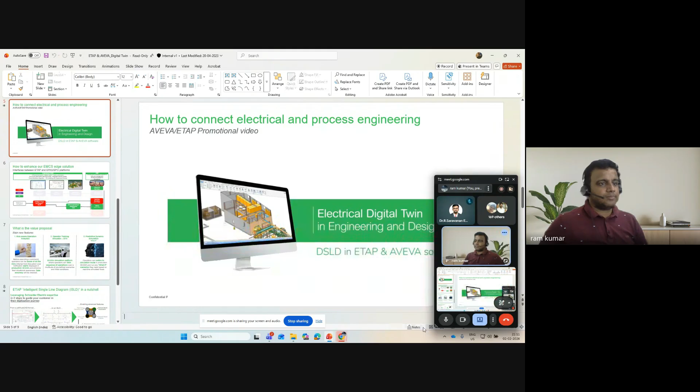Maybe it's the same video. Let me go back. Okay. I'm just sharing my screen again. Okay, sir. Yeah. Sir, voice is not coming, sir. Okay. Can you share the link, sir? Yeah, just a minute. I will just play it. Yeah.

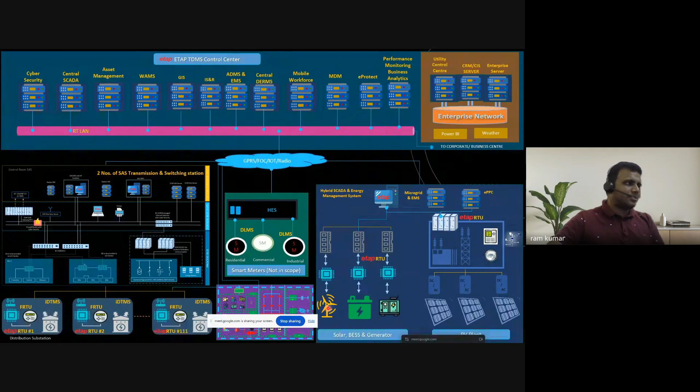Now there are some expansions needed from the perspective of renewables and EVs coming in, where we are trying to gather real world data, like wind speed forecast or the amount of sunlight we can see in the solar panels. So real world data gathering is something we are working on today, and ETAP is heavily investing in it. This might be one of your research topics if you are looking for one.

Now, current challenges hindering digital twin adoption: data integration complexity, because the integration of smart meters in the public or government grid infrastructure is very limited today. It might exist at the level of discoms or power distribution substations, but at the end consumer level it is very limited, which is a challenge for having a digital twin of the entire grid itself. The grid digital twin or a microgrid controller communication is very essential to have complete control by a digital twin.

Interoperability issues: digital twin platforms struggle to interface with existing IT, OT, and IoT systems. Even within our electrical industry, each and every OEM or software company has its own digital twin, our own solution. So interoperability means communicating with ourselves, and it is a challenge today. We have not reached an agreement.

Modeling and simulation complexity, I think I've already spoken about this. High fidelity models are needed today, which can resemble real world equipment or real world operation, or which can help us capture dynamic grid behavior, including renewables and electrical vehicles. I think for electrical vehicles it's already there, each and every car today is connected with GPS, and we can also have data acquisition from electrical vehicles.

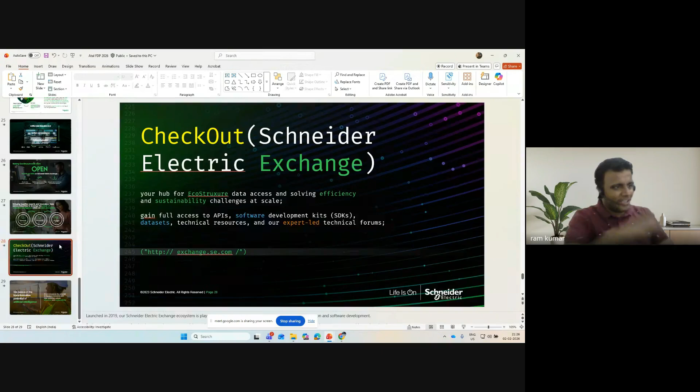Today we are based out of Bangalore, and we serve the entire world for power system studies, power system analysis, digital twin, electrical design, power system design. Our main focus is around data centers, because that is where we are heavily invested in. If you want to know more about what Schneider Electric does, you can find a lot in our website or YouTube. There are a lot of things available. Any questions? Because I didn't see a lot of people interrupting me.

Or any questions in the chat? Yeah. Sir. Yeah, just a minute. Yeah, tell me. Thank you, sir. Very nice presentation. Yeah.

Digital twin technology, in the case of industries, it is understandable to me, that we can develop a 3D model and we can understand and improve the operation of that industry during the design itself. Otherwise during operation we can do it too. But in the case of power system, which part of the power system network should be modeled? Generator, or transmission, or distribution? Whether we want to have a 3D model, because we do only two-dimensional analysis in ETAP, right?

Yes, exactly. Then so, what part of... yes, thanks. Tell me, yeah, sir, please. So today, you see a lot of industries adopting digital twin because industries want to optimize, they want to move faster.

Okay, and the entire power system, if I speak about it, is a grid. There is a huge investment that needs to come in from the government or a public body. They need to invest a lot, which they have not started.